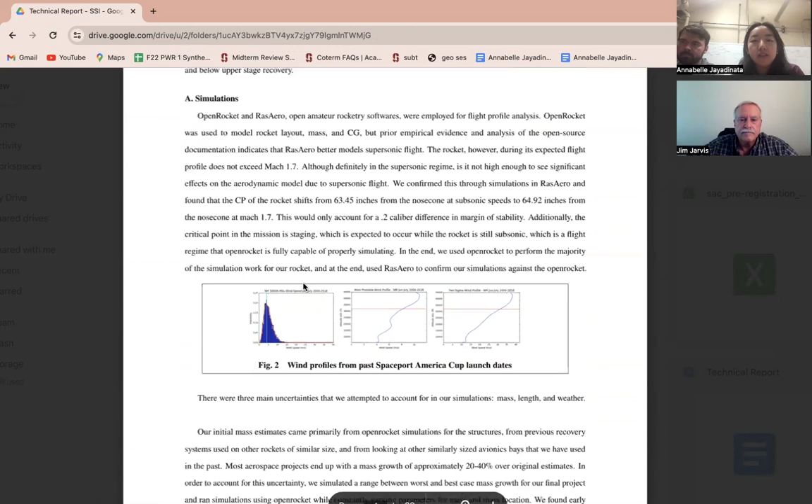And yeah, we just have a few simulations. One sec, wait, this is not the latest one. I think I have a...

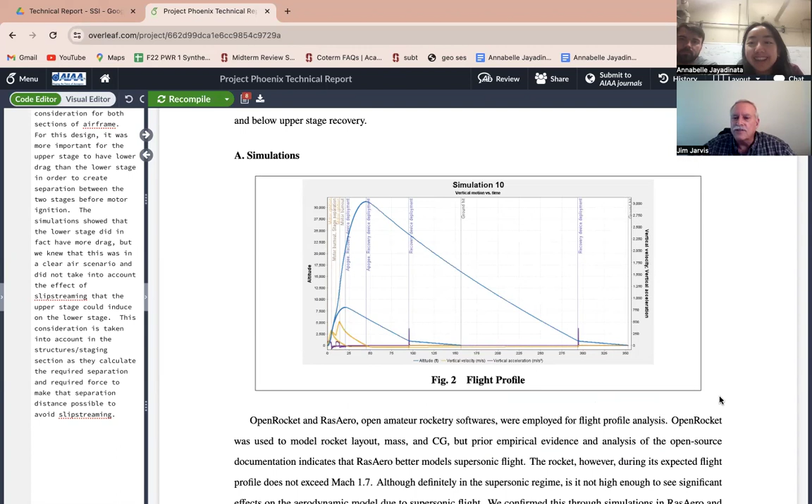So this is just the flight profile of the rocket. Usually the only part of it I care about is the lower left hand one square inch. Okay, let's see.

That timing looks okay in terms of the amount of delay time. Looks like you're lighting the... well, we'll go over the timing for the staging at some point.

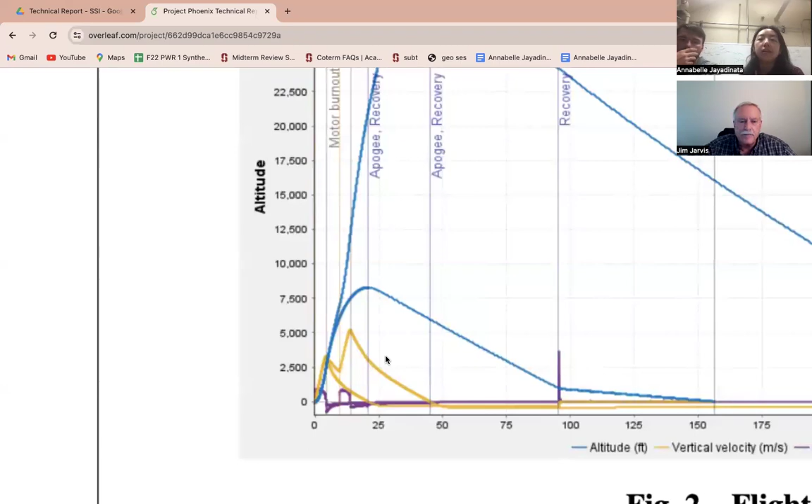And the staging mechanism is three events: activation signal at target velocity or apogee, then stage separation and forward motor ignition, and aft descent.

Okay, just a moment. So I'm not quite sure I understand the order. Normally you would separate the stages first and then signal the igniter, so it's like event one and two are backwards.

Yeah, this might be just poor phrasing. Activation signal would be in terms of the actual staging activation, the black powder charge ignition, or the E-match, rather than the actual ignition of the motor. So event one refers to us meeting our flight conditions to safely stage. With those flight conditions met, we send a signal for the E-match to ignite, lighting the black powder charge for staging. And then the third event is the forward motor ignition.

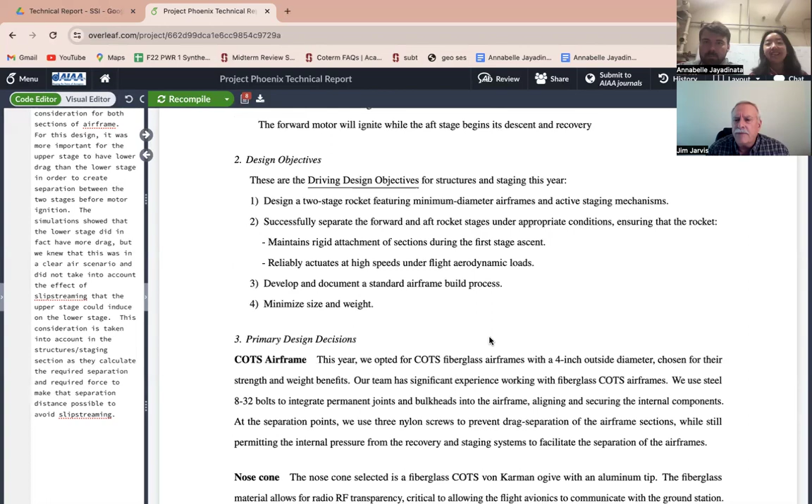We can keep going more through the structures side of things. Can you go back to the picture? Let me zoom in as much as you can so I can take a quick look.

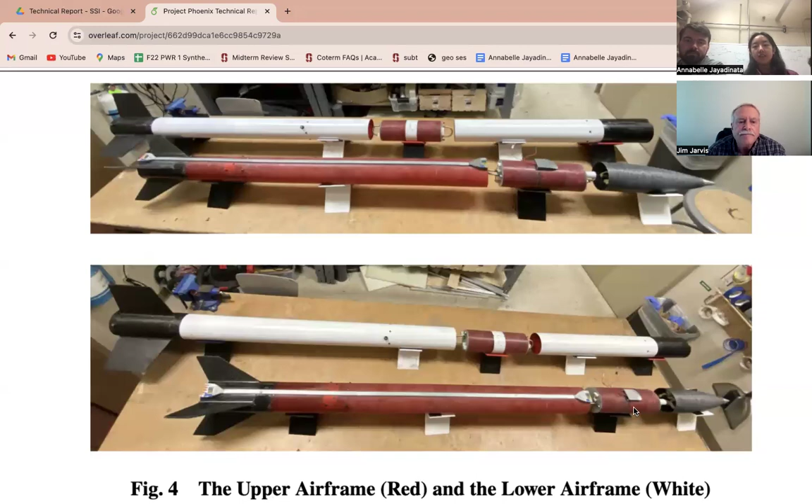Are you going to be routing both the igniter and the separation charge through that conduit? Yep. Okay, so we can move on.

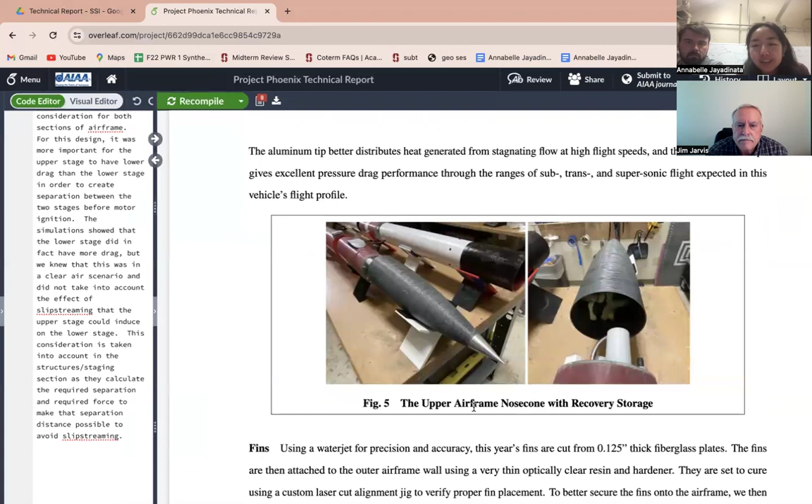If you want more close-up pictures, upper airframe nose cone with recovery storage. These are just the fins, and this is the upper fin can, the coupler, the booster motor overlap.

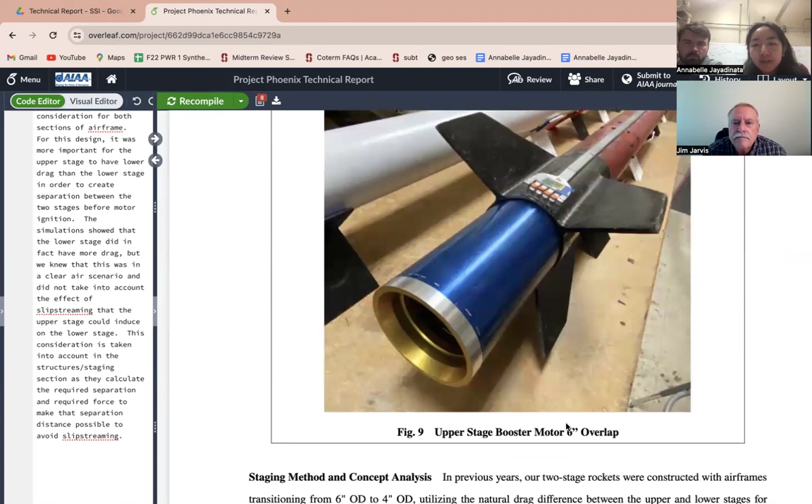Go back to the booster motor. Is it going to hang out that far? Yes, sir. Okay.

Just for landing? That's actually going to be our main source of stabilization and support to hold the stages together before black powder staging. This is what's going to overlap with our airframe on the lower stage, and that main strength and stability is what's keeping the upper stage from wobbling or having any instability issues as we light our booster.

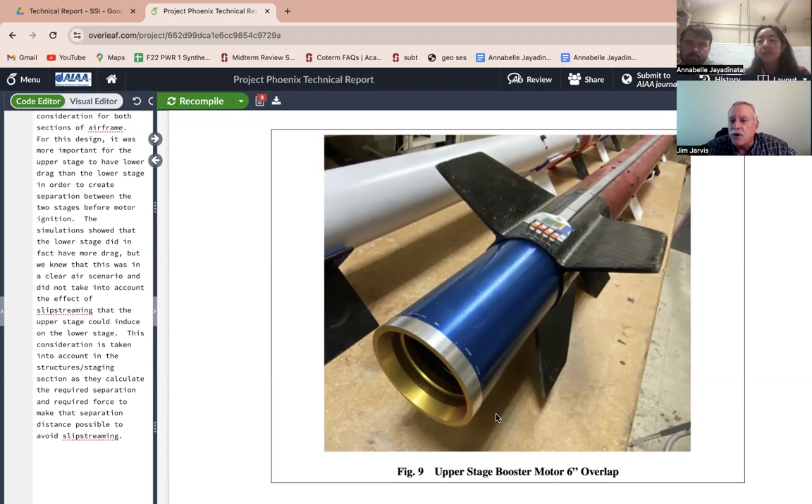Oh okay, I saw the upper stage booster and thought maybe that was the booster motor, but that's your sustainer motor, okay. And I see you managed to get one with no thrust ring on it, so that's what you're going to use for your staging coupler, the motor itself. Yes, sir.

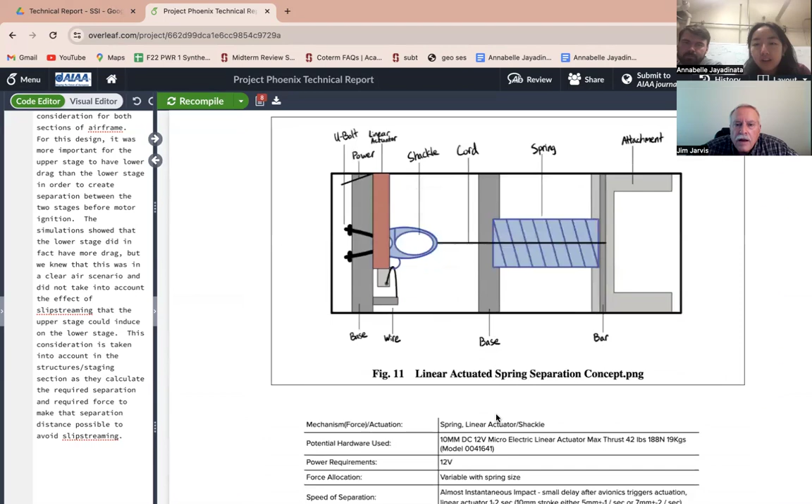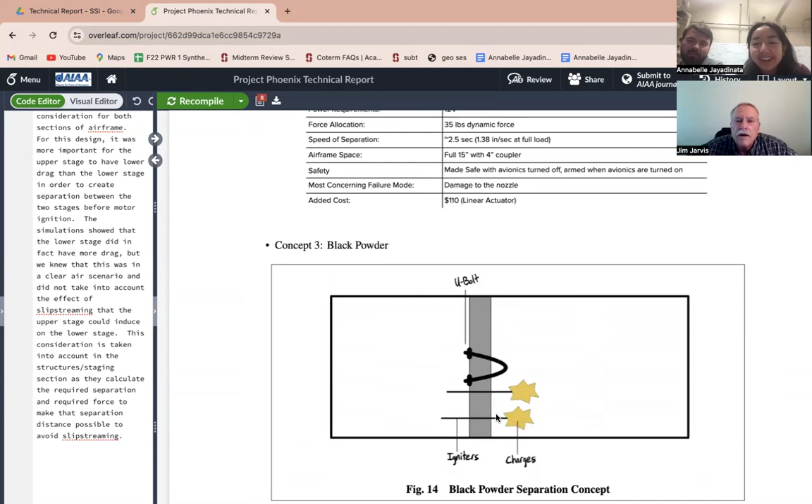This is the black powder staging bulkhead and charge well. And these are just some concepts that we tried. We tried a few staging concepts before we settled on black powder, and fortunately black powder works significantly better than the others did.

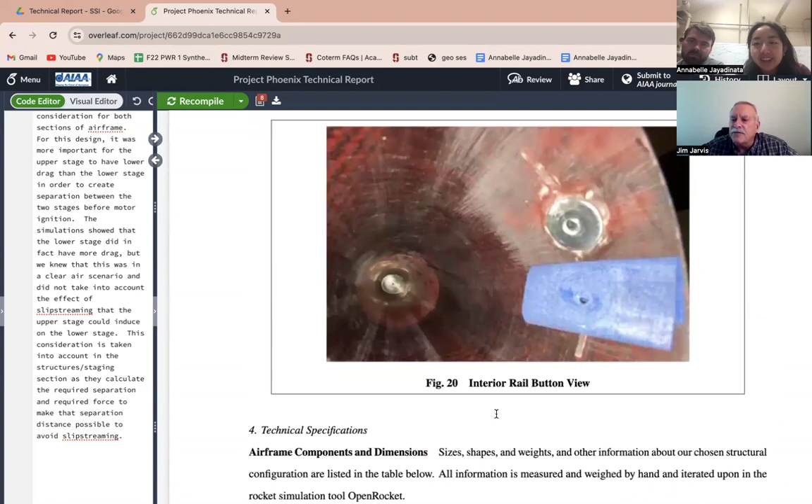So you've tested stage separation with black powder? Yes. How much are you using? We're using 1.5 grams right now. We did ground testing with 0.5 and 1, and we've done two launches with 1.5 to verify that it stages correctly.

You mean 0.5, right? Oh, that's 0.5, sorry. Yeah, the typical amount is somewhere between 0.5 and 1. And if you go much above that, you basically just end up frying the wires more than anything else.

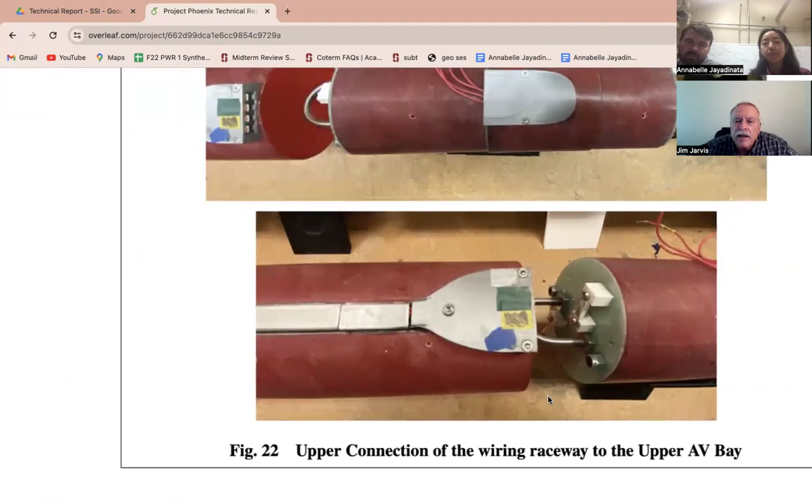So blow that picture up just a little bit. Okay, so the nose cone is on the left, right? Or, sorry, no, the nose cone's on the right. We're looking at the upper AV bay, so you're going to connect whatever this fitting is for the gray wires. Oh yeah, this is the raceway, is what we call it.

Okay, we'll go on. I'm a little curious about some of the components on the bulkhead there, but you can show me that later. Okay, so, oh, the bulkhead.

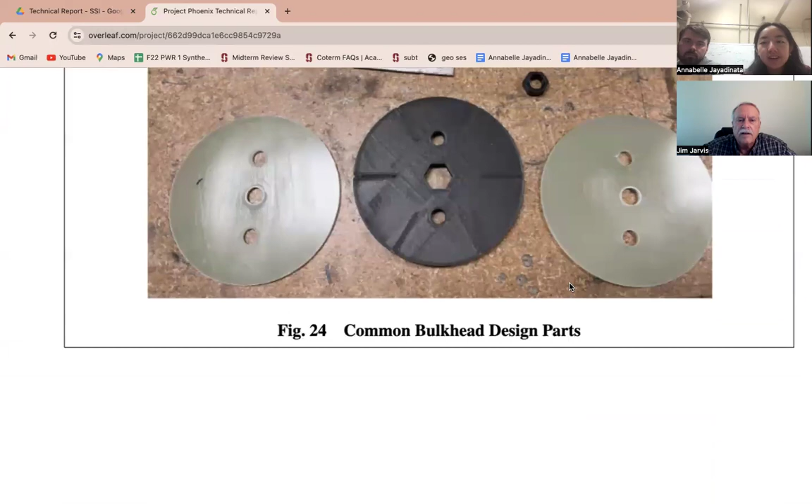You want to show how you connect the igniter? Yes, so at both the top and the bottom of our raceway conduit, we have Wago lever connectors to quickly plug in our E-matches, both at the bottom and at the top. Are those spring-loaded clips? Yeah, the orange part levers up and you shove the wire into them and they hold on pretty tight. Usually the wire breaks before the connection does.

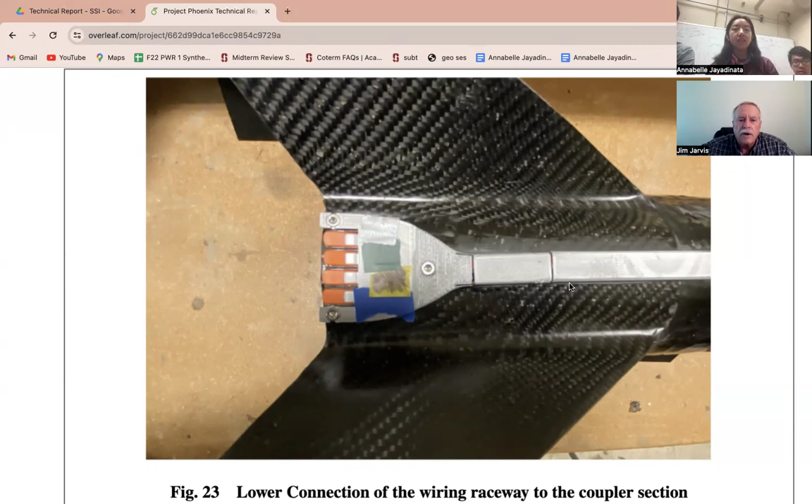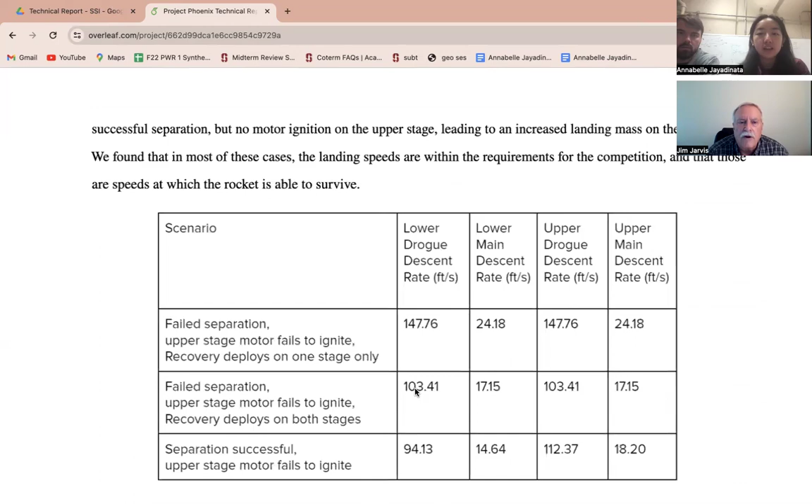Like this? Yeah, I mean, to actually show me. Oh yeah, we have them. Okay, yeah, that'd probably be better than trying to decipher this. Okay, got it.

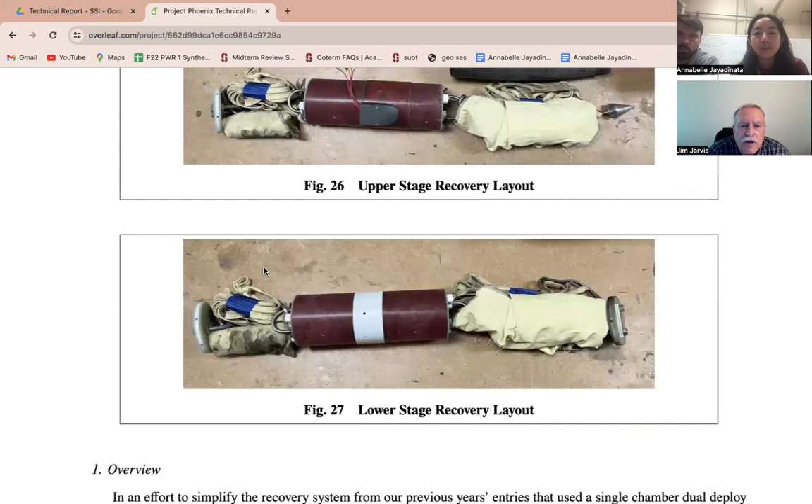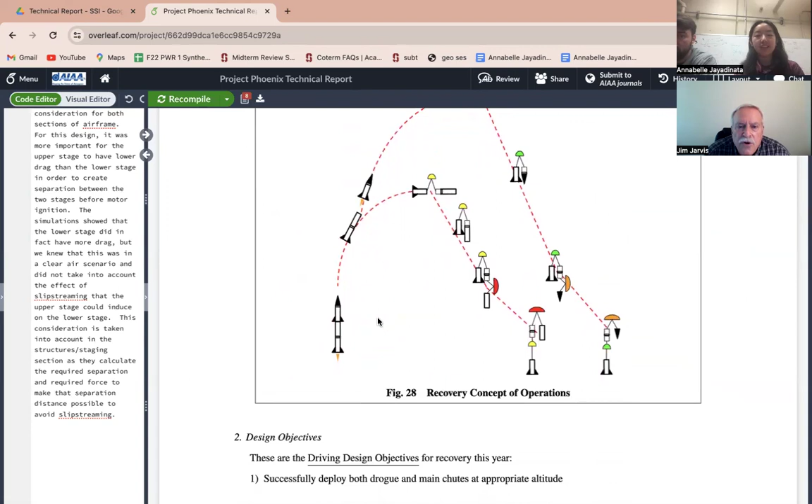But yeah, and then this is the concept of operation, let me just check that real quick. So the concept drawing. Yeah, so currently on the booster, you're showing the drogue in the middle and the main is on top of that. And then on the sustainer, the same thing, I think.

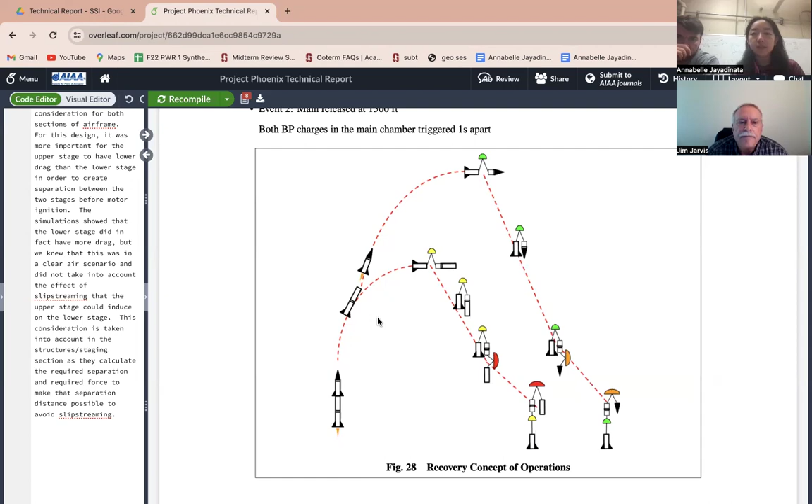Now, which is this, the booster, sustainer, or both essentially? They're both. This would be the same for all of our AV bay lids. Okay, so you're going to have the lid on there and then a couple of rods that hold the bay together?

Mhm, and then how big are those, the rods? So our threaded rods are 12 inches long. Okay, what diameter are they? Quarter 20.

On some other reviews, I'm recommending that people go with like 5/16 on those, for the sizes of the rockets. Now yours is 4 inch, so I guess I'm not too worried about that. On another team, it was a 6 inch rocket and they were doing the same thing, and you start worrying about the harness making an asymmetrical tug on the lid, and then the rods maybe aren't as strong as you'd like. For 4-inch, I'm not quite as worried about that.

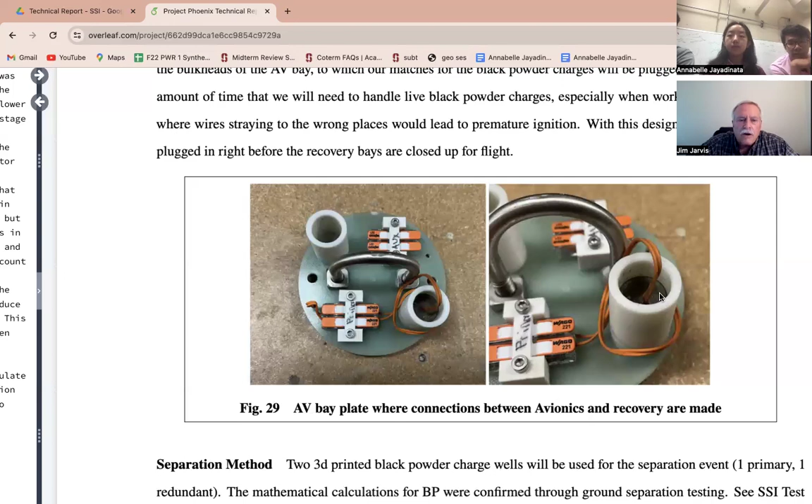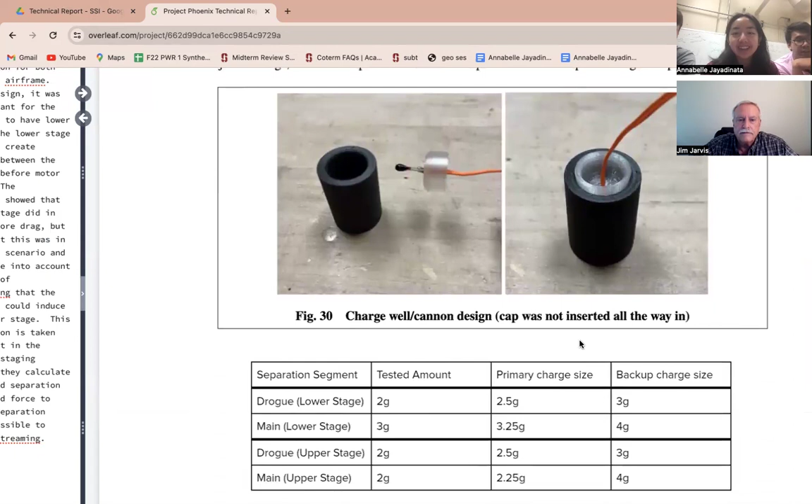Oh yeah, this is the design. Yeah, I didn't insert the cap all the way in because there was no way I was getting it out without firing a charge.

And just the AV section, if you want to know, we have an Eggtimer Quark for the backup, SRAD, and then Blue Raven is the main COTS flight controller, featherweight GPS, and a mini switch for arming. And have you flown the Quark yet? Yep. Okay, because they require a test flight, so you might have in hand with you once you get to the site, just to have a plot that shows the output of it.

Yeah, that just proves you flew it in a flight. Oh yeah, we have data in our test reports. And then this is just the PCB design.

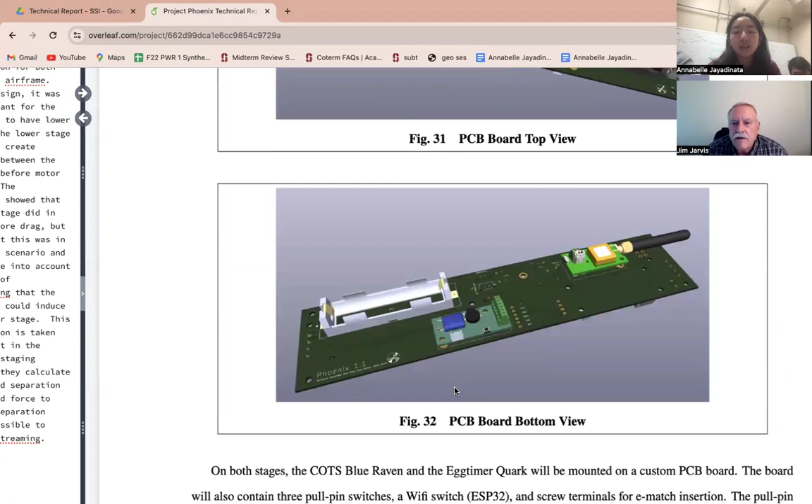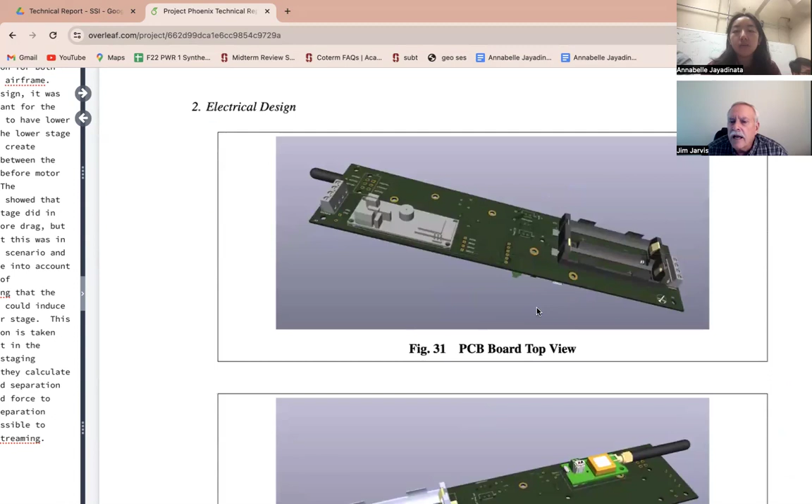Okay, so what batteries are going to go on there? 18650s. Okay, and so you're gonna have two of them? Yeah, two for the backup side and one for the COTS side.

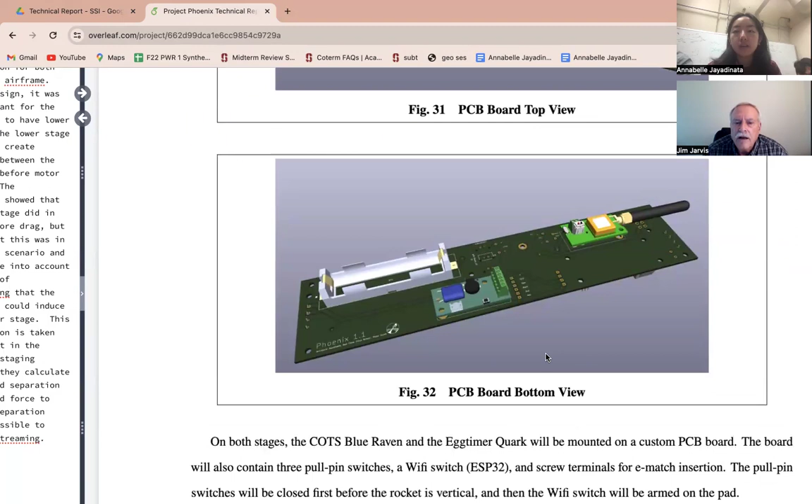Yeah, so this is how it's set up. Okay, let's look at this for a minute. So this is your sustainer, you're gonna run the Blue Raven off one cell, yeah, okay, and you have the switch to the igniter. And is that switch interrupting one lead to the igniter?

I believe so, yeah. Is that like a screw switch? We use pin switches for all of our mechanical switches. Pin switches, the one you pull. Oh okay, pull pins, yeah, okay.

Okay, so that's the Blue Raven. And then you have the Eggtimer. Now the Eggtimer has the Wi-Fi switch, right? So per stage we have dual Wi-Fi switches. The Eggtimer has the built-in Wi-Fi switch, and then we also have, it's not on the diagram, the Wi-Fi switch for the Blue Raven.

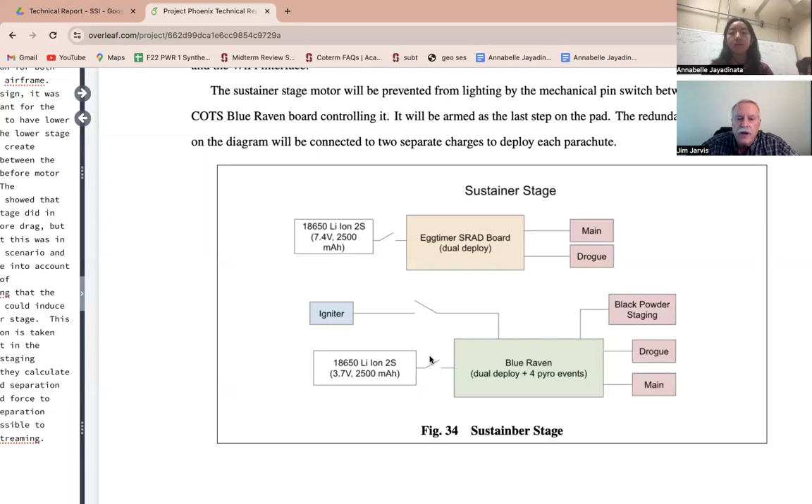Okay, so on this one, for the Blue Raven, what you're planning to do is turn the Wi-Fi switch on when the rocket is horizontal, right? Yeah, so the Wi-Fi switch will be on. Okay, and then you're gonna power up the Blue Raven once it's vertical. Yes. And then for the Eggtimer, that also has a Wi-Fi switch built in?

Okay, and the rules don't actually allow you to turn that one on because the Wi-Fi switch is integral to the altimeter. But I'm gonna let you do it as long as you do a ground test, as part of the all-up test, to turn that on and verify that it works okay. So if you were using that for the sustainer igniter, I wouldn't let you do it. But since it's just for the black powder charges, you can turn that one on the ground and then arm it when it's vertical. Okay, thank you so much.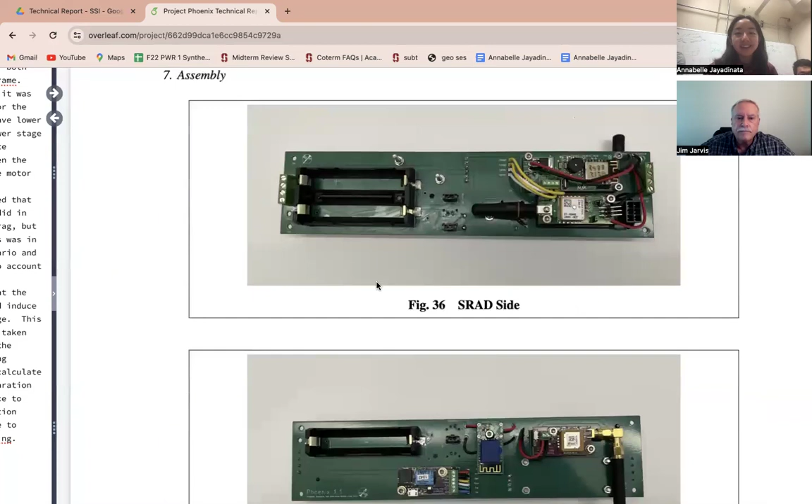All right, yeah, this is the actual board. Now, how are you gonna constrain the batteries in the battery holders? We have this casing that we screw in. And then we also have a casing on the other side. Okay, and let me look at those, let me look at this for just a second.

What are the white rectangles right in the middle? Is that the battery connector? Those are our pin switches, or pull pin. Ah, okay, all right.

Now, I think I saw some mention that you wanted to remove the pull pin switch for the igniter when you were horizontal. So I think what you're saying is that you would turn on the Blue Raven horizontal and pull the pull pin for the igniter while horizontal. So when we pull the pull pin, the Blue Raven will still be off, but then once it's vertical, we're gonna turn on the Blue Raven through the Wi-Fi switch. Okay, but you can't pull the pin until it's vertical, the pin for the igniter, right?

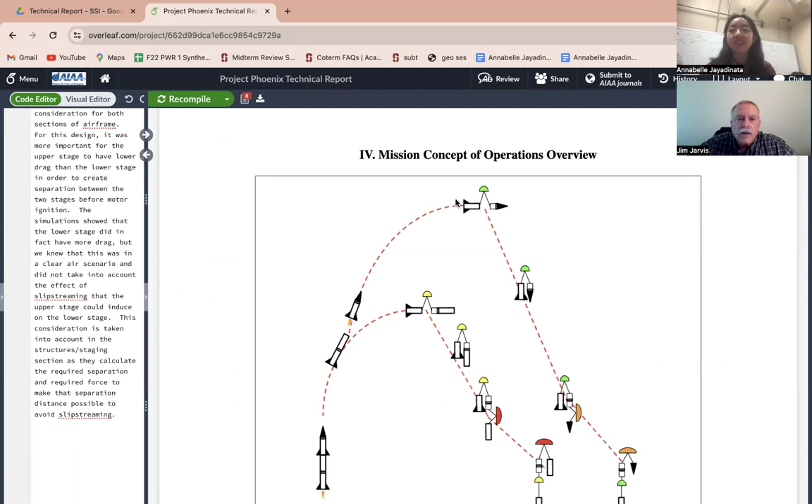Do you have any other questions? Well, let me look down my list here and see what questions I have. And then we can look at the rocket. Let me see.

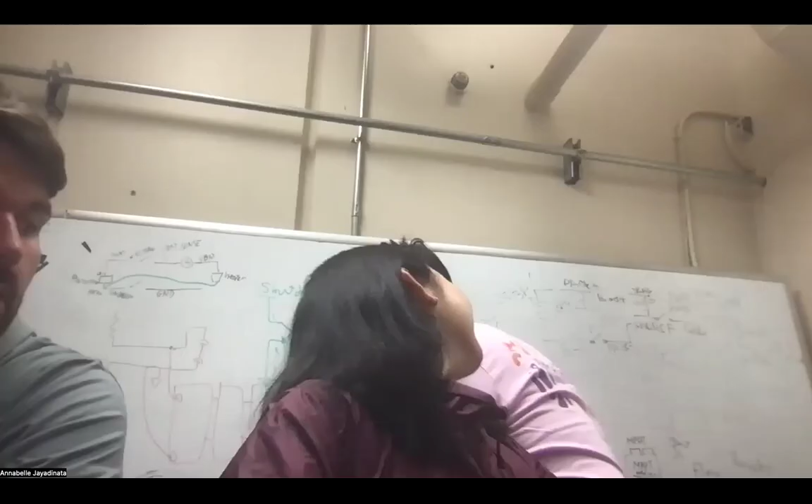Okay, one thing I'm gonna want to see on the sustainer, I think you mentioned there's an aluminum thrust block for that. So we'll just make a note to look at that, so that we're all confident that the motor thrust is not gonna let the motor fly through the rocket.

And what size charges are you, have you kind of decided the black powder amounts? For recovery or staging? The recovery. Recovery. Hey Matthew, what's our black powder charge for recovery? There will be a table in the report with all the sizes. Okay, yeah, I think I saw a slide that we passed that had it. Oh yeah, it wasn't quick enough. You do, it's here.

Okay, and those look about right. Okay.

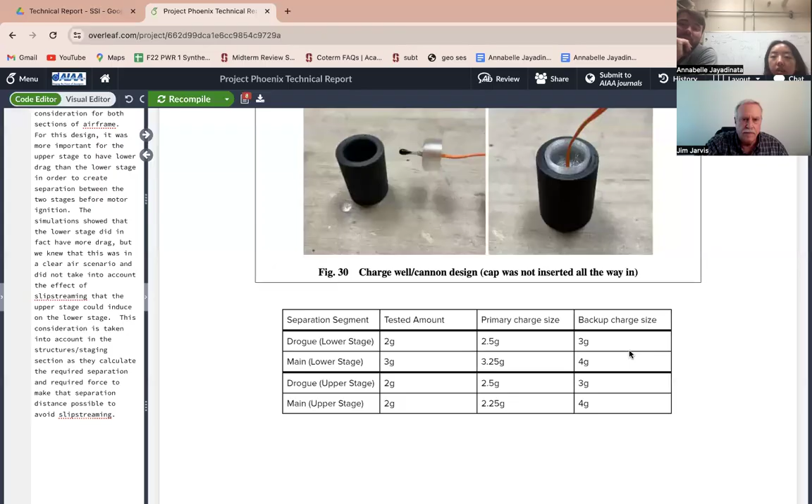Okay, so one of the things I wanted to look at on the rocket was the thrust transfer. I'm just gonna look down the rest of my list. Did you have the rail buttons and where they're positioned? If you want to pull up the technical report, I can start discussing it now. We did, because with the airframe situation — Matthew's trying to put it together — we de-integrated some of our hardware, but I can give you a decent run through of it right now.

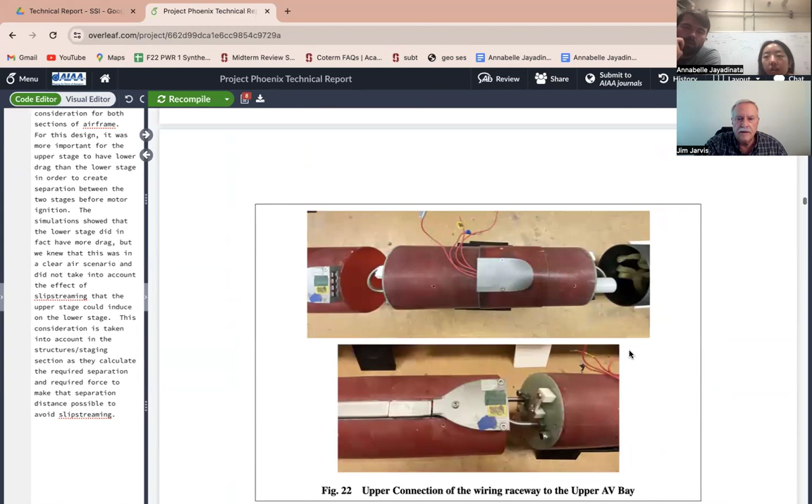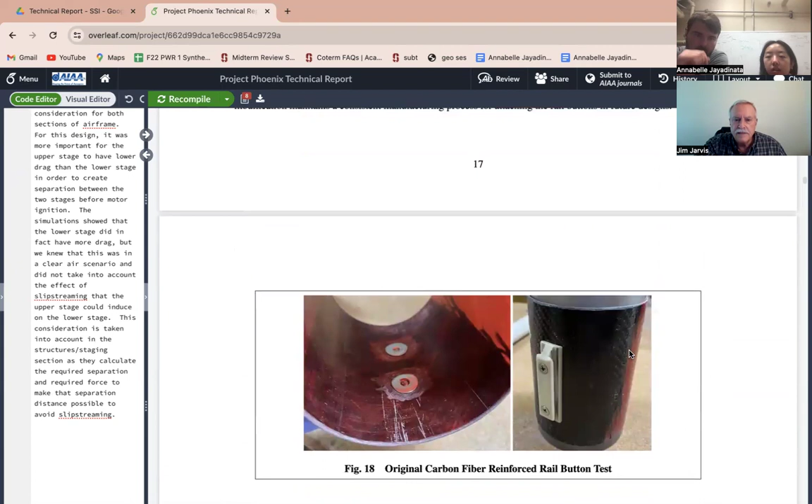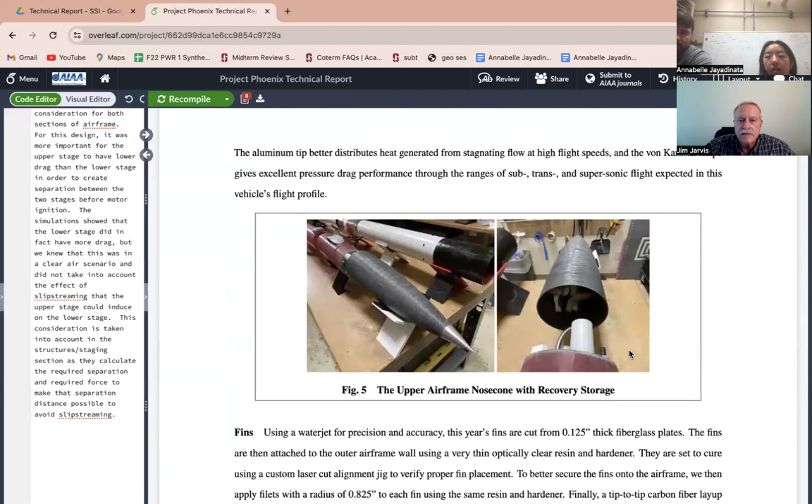Scroll up — yep, you can actually scroll back down. So these are our rail buttons. If you want to scroll back up to this top picture, this is our test. Let me see if there's a better picture of where they're actually located. If you want to go to the actual entire view of the rocket — they're both on the booster stage.

Those are our two rail buttons. They're through, and I can show you kind of how we created them. Are you seeing the rail buttons all right? This one specifically is kind of tough to see in the picture. Yeah, yeah, I can see them.

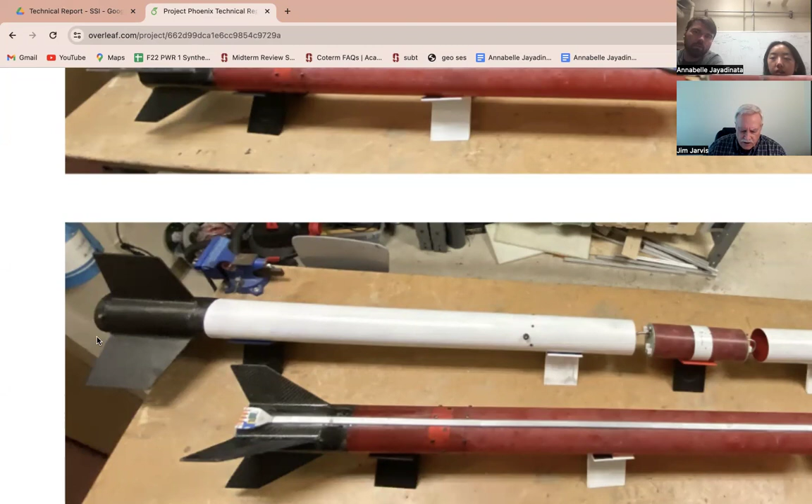Okay, now one thing I noticed, I think, in one of the reports, you were calculating a rail velocity of 94 feet per second. So one question I would ask is, when you calculated that number, it should be at the time that the upper rail button leaves the rail.

So if that distance is 4 feet, for example, maybe 3 to 4 feet, instead of assuming a 17-foot rail, you'd have to assume a 13-foot rail. Because you lose control at the point where that upper button leaves, that's where the calculation of rail velocity needs to be.

And with your rocket, it's reasonably heavy, right? And you've got an N3300, which, I mean, it's not an N5800, it's an N3300, so that reduces your thrust a little bit and your rail velocity. So I'm just gonna assume from your expressions that maybe your rail velocity is gonna go down once you do that calculation correctly, okay?

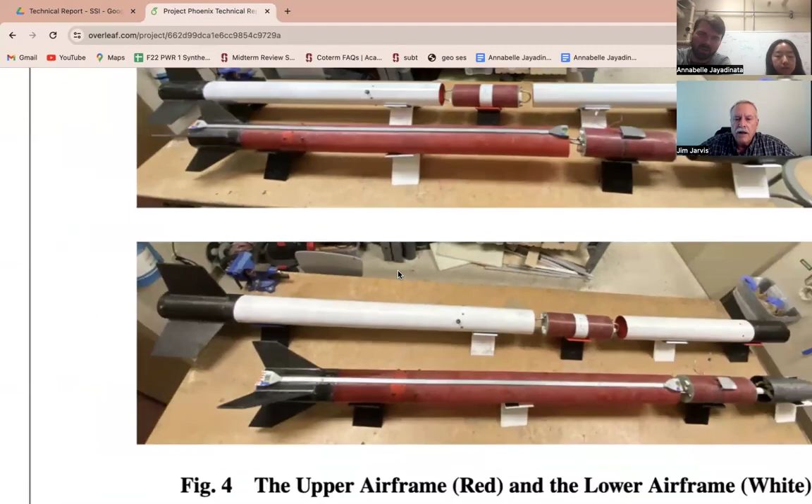Because our motor is so big and the launch lugs, and the motor's minimum diameter, we actually ran a test to integrate and manufacture the launch lugs such that they can still leave space for the motor while remaining strong and rigid. So this was just our test - we're not using this variation of launch rail button. We're going to be using...

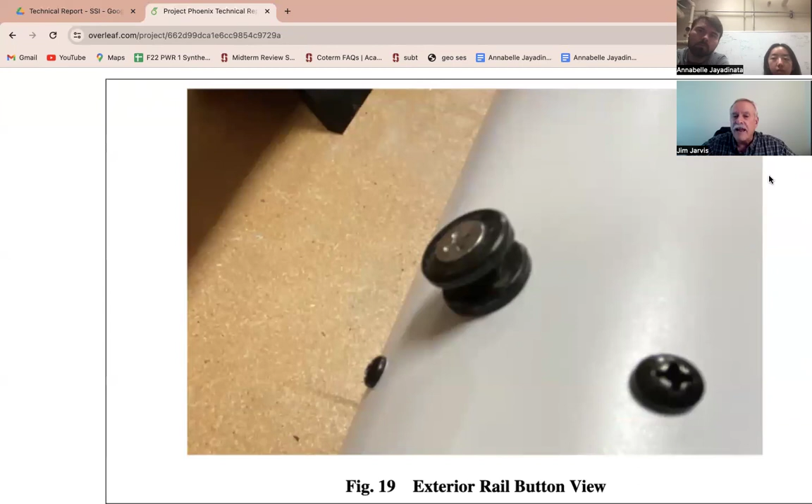How are you clearing the motor with your buttons? That's a good question to ask, since your minimum diameter - how are you securing those screws? Because having them only through one airframe section is not really a very strong connection.

I may have Matthew come in - he did most of our tests for this. Hey Matthew, can you come answer a quick question about the launch lugs?

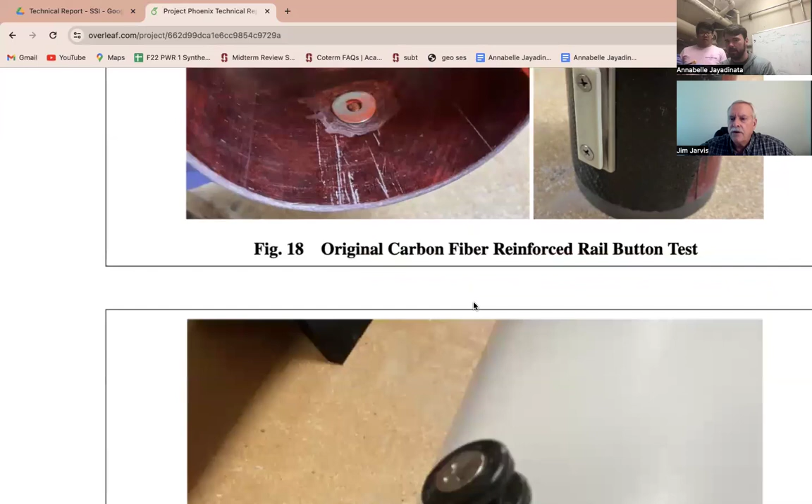He asked how do you make it stable when it's minimum diameter, strength-wise, with the motor. So he's just asking about this process. Did you show the test report? I haven't brought it up yet, but part of it is in there.

The question is, since you're at minimum diameter, how are you attaching the rail buttons so they're secure enough? Threading a rail button into a single thickness of airframe isn't a very strong connection. We use the 1515 launch lugs from Apogee, which have a little barrel piece with metal that goes on the inside of the airframe.

But that's going to get in the way of the motor. We have the airframe sanded down where that part goes, and that part of the airframe is where our layup for the fins are, so we increase our thickness by a good amount at that location.

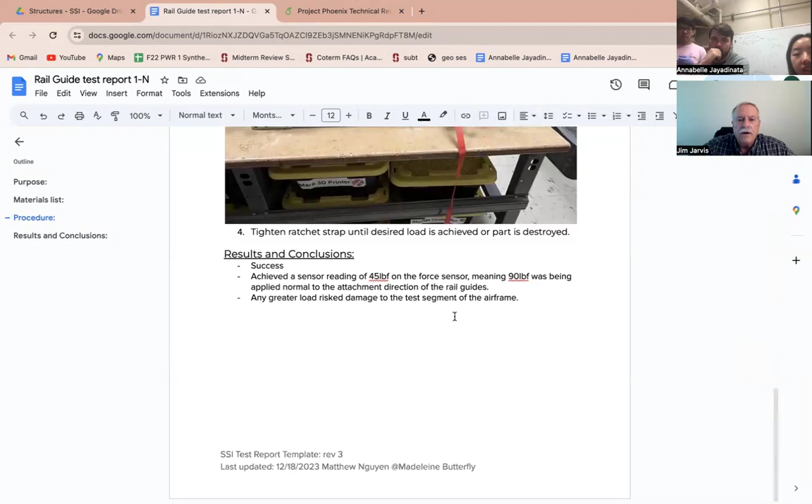So we did testing on how we mounted it, and confirmed that we were more scared of the airframe breaking than our attachment method breaking. Well, whatever fails, it doesn't matter. If you reduce the thickness of the airframe there, you might be weakening it a little bit, but sometimes the motor has a little wiggle room in the tube, and you can get past it if it's not too tall.

I don't really use single buttons on minimum diameter like that. Any reviewer is going to look at that attachment pretty carefully. They're going to yank on those rail buttons and make sure they're tight and don't come out, so make sure they're secure, that no one looking at them would conclude they're not strong enough.

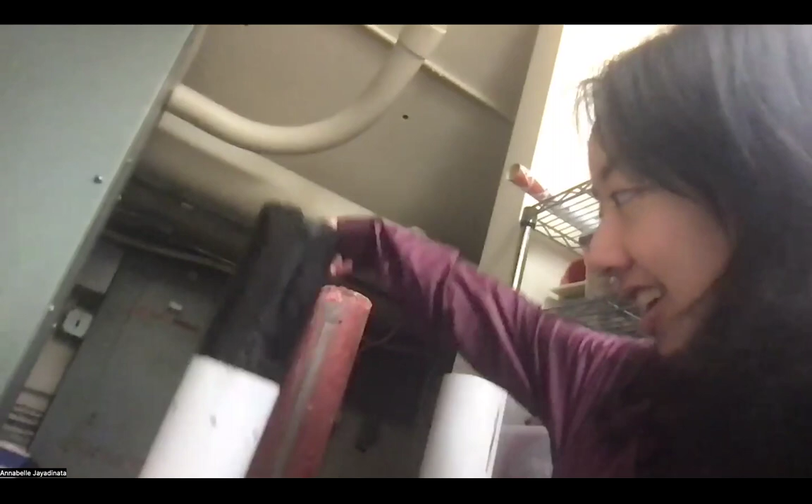That was also part of the reason we're like, wait, should we just downgrade to 10K? Because we do need another launch with the 2-stage. And then this is the other part of the motor.

The coupler of our booster. This is that black tip that you'd noticed before. Let's just look down in there real quick if you can, point that at the camera. Okay, so is there a bulkhead inside of there, or how are you?

So there will be a bulkhead right here. This will act as not only the black powder charge bulkhead with the charge well, but it'll also have the recovery bolt as well. I forget which form of recovery, but basically for recovery as well.

Now where does that separate? Does it separate at all? So this is where the motor's coming in. So the two stages will separate on this side, and then the other side when it recovers will separate, and this is where the lower stage booster AV bay is down here.

And so then it'll separate at this line with the AV bay, and then the other side of the AV bay connects to this lower airframe with the motor in it, which is kind of what we were showing before.

Okay, but the connection is way up at the top for the recovery. Yes, for from AV Bay to this piece. I believe the main is in the top for this one, right? Yeah, so the main will be in here connecting to the AV Bay and to this launch lug.

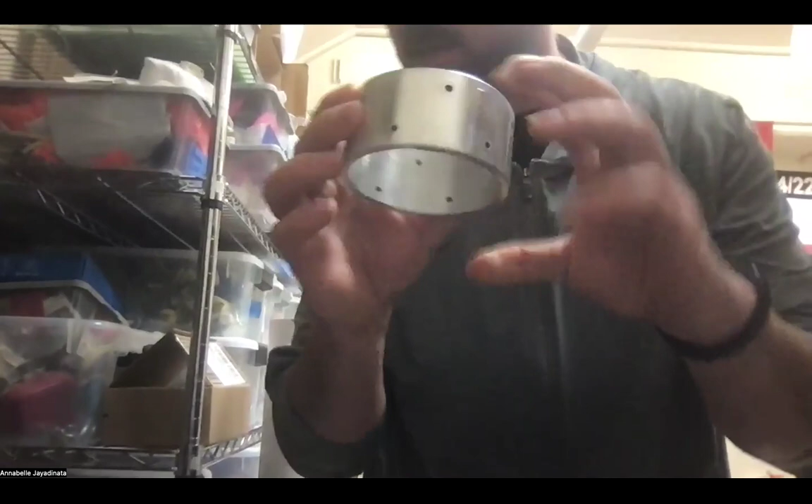Okay, thank you. The thrust block - so similarly, this is the thrust block that's going on the motor. Let me see if I have that here.

There's two sets of 6 screws on the top and then one on the bottom, alternating. This is kind of what it looks like. Okay, and this is also minimum diameter, right? Yes, so you're going to be pushing on the bottom of that.

Right, okay, and there must be a bulkhead or something associated with that. If you're going to retain the motor, there's got to be something. So yeah, oh yes, there is a bulkhead that sits above this. Okay, they're not pressed against or anything like that. There's I think a slight gap in between.

Okay, and then that's you would have a recovery point attached to that bulkhead. Yes, I believe so.

That brings up a topic. Now I think as I recall on the altimeter bay lids, you had U-bolts, right? Yes. Okay, how are you connecting to the motors? What is that connection to the motor itself? I believe it's a threaded rod.

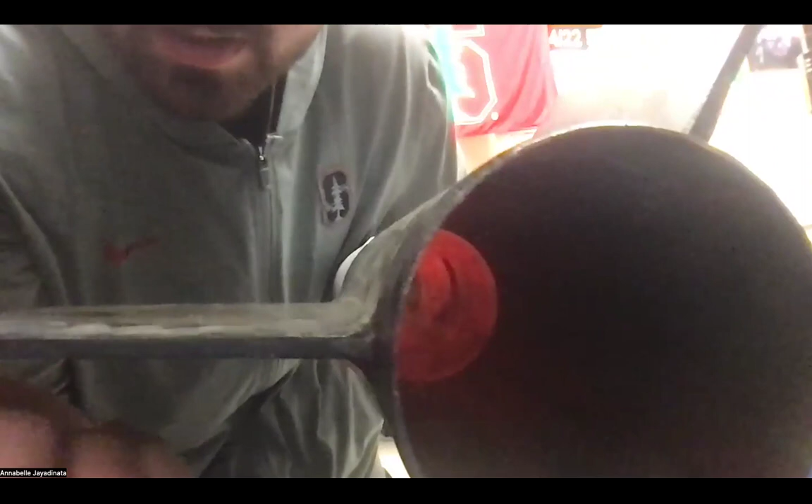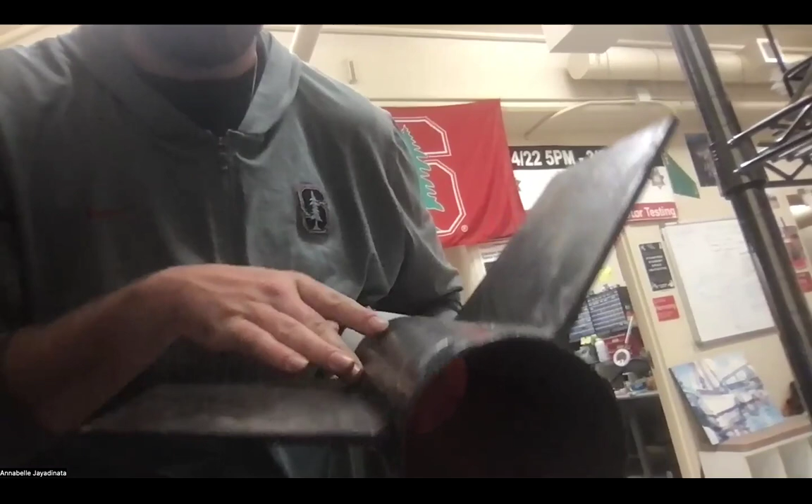We're remanufacturing them right now, but we have a fiberglass layup. You can kind of see the inner line, I think actually we painted over it. We do a bead bond on a fiberglass sheet, 1/8 inch, fillet with Proline, and then we do 3 layers of carbon fiber over top, cut, sand, and make it look nice. Make sure it's all laminate, I think that's the word. Yeah, so my suspicion is that that's probably plenty strong.

My only comment is that when I do that, I make a larger radius fillet. The details of that, it might be like maybe I'd make that with a 1 1/8 or 1 1/4 inch dowel, held at about a 30-degree angle, something like that. And my guess is that you probably used something smaller to form the fillets. The reason for that's pretty obvious, you don't want to have sharp angles with the carbon fiber, you're going to get better strength if it's a little larger radius through the fillets. So that's sort of my only comment, I think otherwise it looks fine.

Perfect, awesome, thank you so much. Do you have any other questions or anything else you might want to see?

Let's take a quick look at one of the recovery harnesses and the chute attachments. Matthew, recovery harnesses. Yeah, it's all...